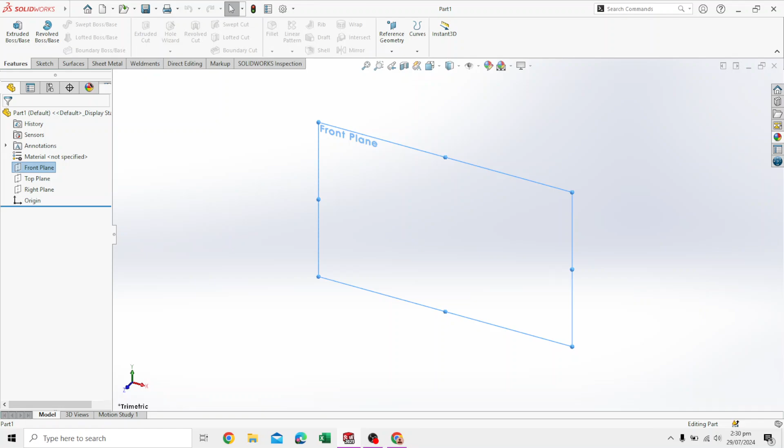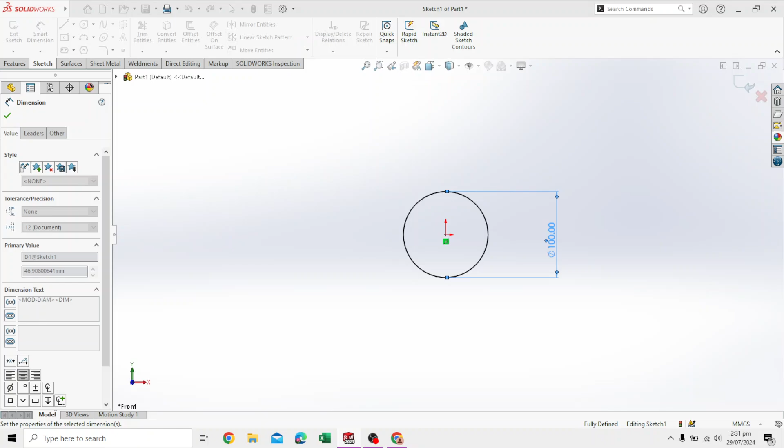And sketch, make a circle, say yes, smart dimension, say 100, yes, 100 millimeters, and say yes, this is what we need.

Move out of the sketch, go extrude it by 80. Just keep clicking this till we reach 80. Say yes, this is what we need.

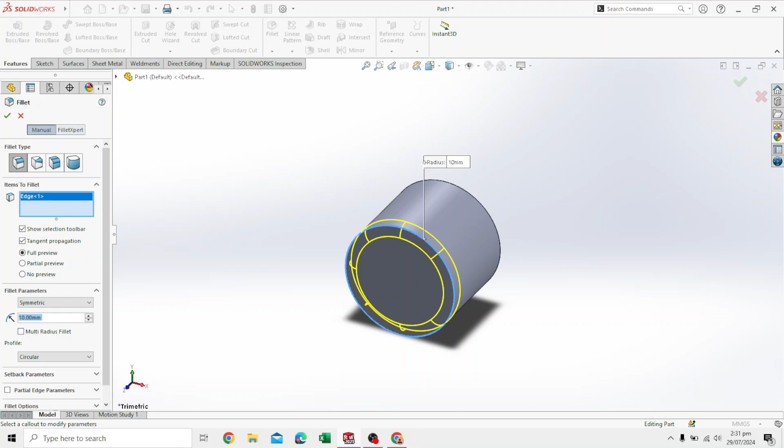Fillet the corners. I think this is the right amount, by 10. I think this is good enough. Yep.

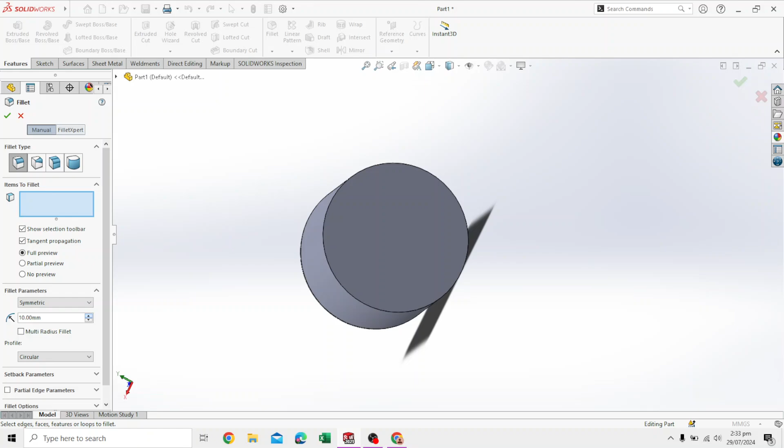Moving on to the fillet, we have to fillet this side by 10 millimeter, this side by 20. So we just go ahead and apply that again. This time just increase the radius of the fillet. Click on this. So again, this fillet is bigger than that one. Say yes, this is what we need, and then we will use the shell command.

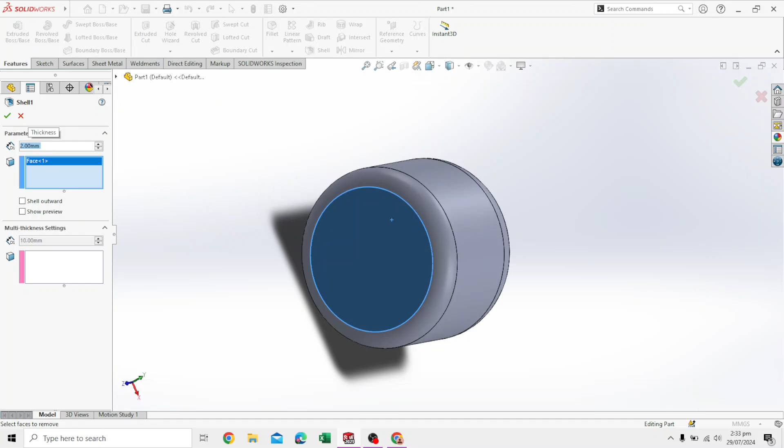Click on this and say we need this to be 2. Say enter, and we say shell.

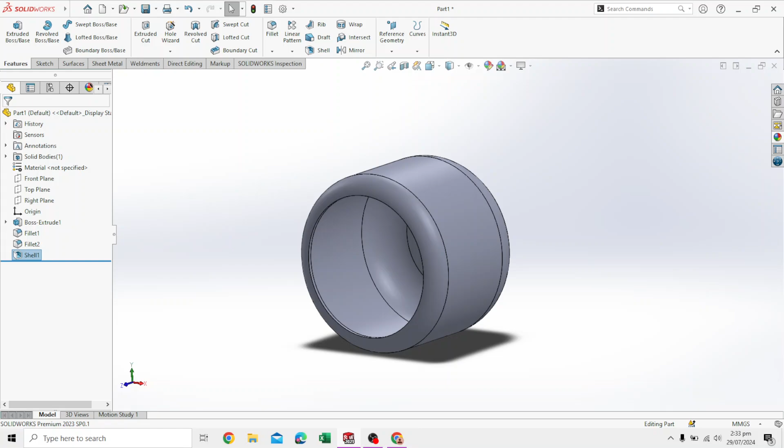So we definitely don't want to shell this surface. We need to shell this entire structure because it's a solid inside, but we need to select the entire structure and then press shell by 2 millimeters and say yes.

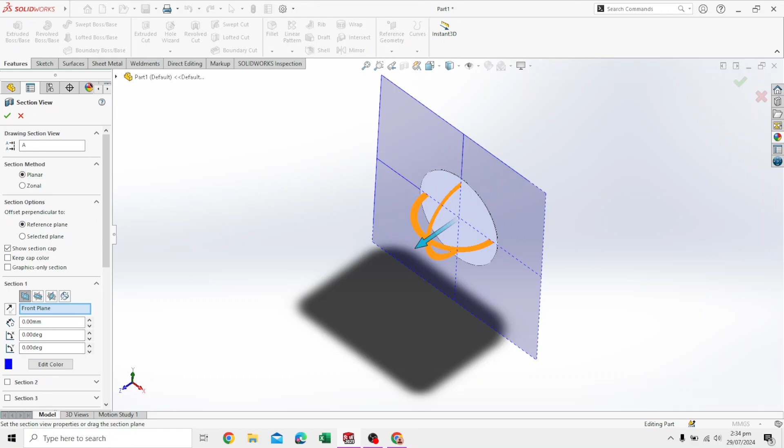And now it's shelled, I mean it's hollow inside, and if you want to be sure, you click this button and move it a bit, and you can see that it's hollow.

So it shelled the entire structure because we started by drawing a circle and then extruded it, so it was a solid piece. Now we shelled it by 2 millimeter after selecting the entire structure, so we can see that its walls are 2 millimeter thick and the rest is hollow.

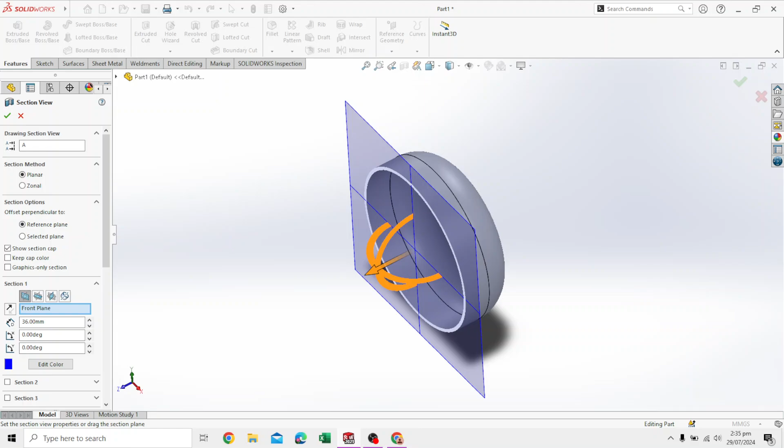So obviously this is going to be the casing of the fan. So we will start drawing on the smaller fillet side, the side we applied a 10 millimeter fillet. This is the side we applied the 20 to. So we'll start drawing on this. Let's sketch.

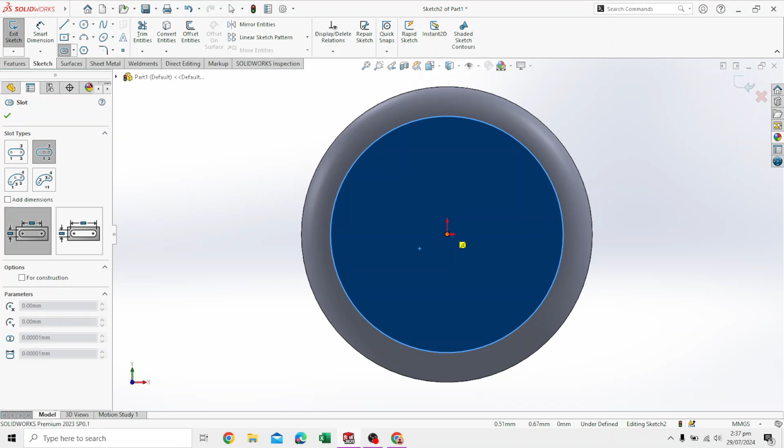We will draw a center point straight slot. It's basically an ellipse, not really an ellipse, but this option, center point straight slot, select that. And from the center point, we just click on the center point. It'll start dragging out a line, and you can just, nope, that's not what we need to do.

Let me just do that again. Don't need to click the center, just need to move upwards in that direction, align it, and draw an ellipse, wherever you want to call it.

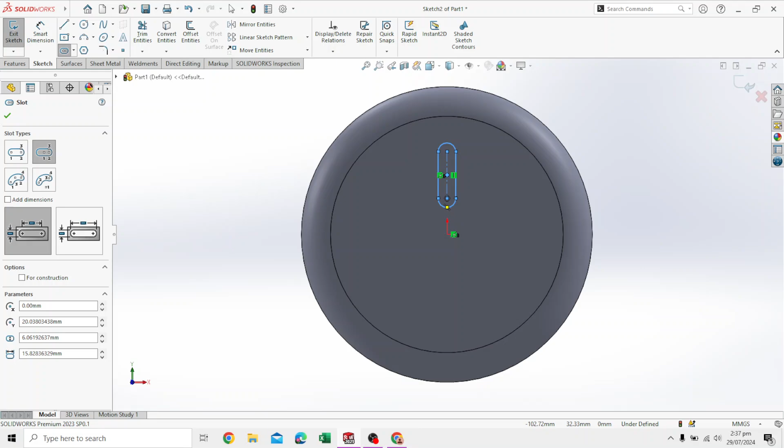Use smart dimensions, and from the center of this to this, it should be 25. And the entire distance of it, meaning from this point to this point, this little piece should be 15. So that's looking nice.

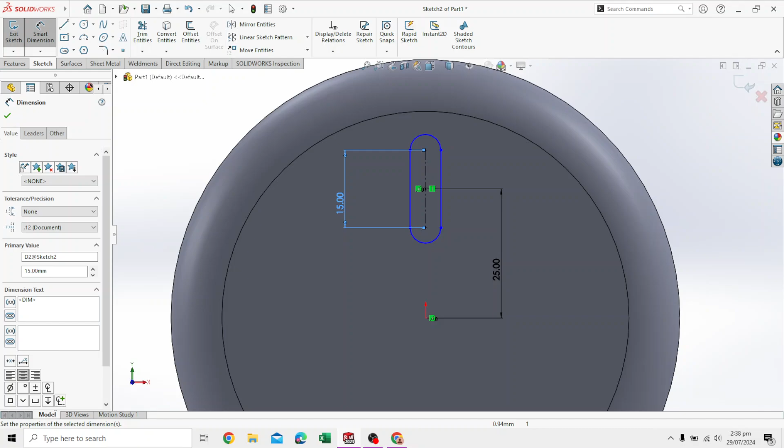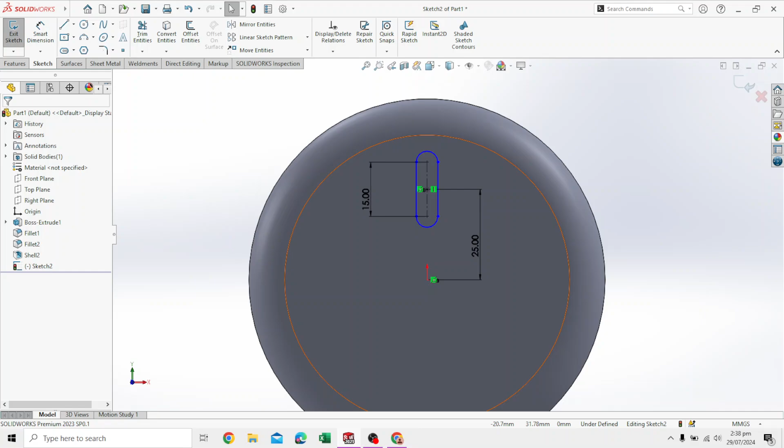And I think we can control something else, but I think this is good enough. This is basically the little slots that are cut out at the back of the fan housing to allow air to go in and cool the motor. This is basically cooling. This is made for cooling. These cuts are made. If you ever see the back of a fan, you'll see little cuts made in this way.

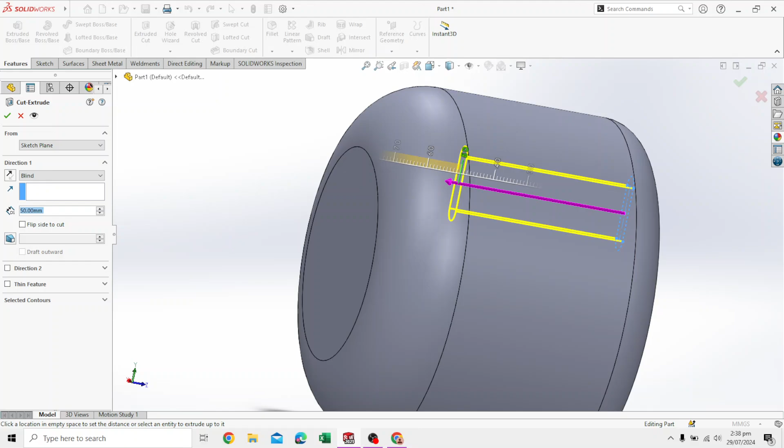So we just say extruded cut. This surface is already obviously created. Make sure it doesn't pass through the front because we need that. And we say, okay, this is what we need. So now there's a cut and no damage to the front or anything.

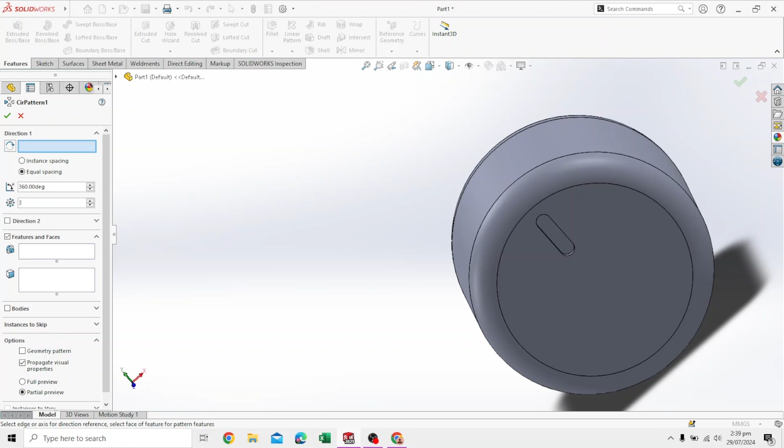We go to linear pattern, circular pattern, drop down menu. There's an option to circular pattern. First, we select the direction in which we will need the pattern.

This is a circle, so we said, okay, this is the direction, and the feature to what feature do we want to pattern. So this cut that we made, extruded cut, so now it's showing a preview of how it will look like if you were to pattern this 3 times, 2 times, 4, 5, 6. Do it as you please.

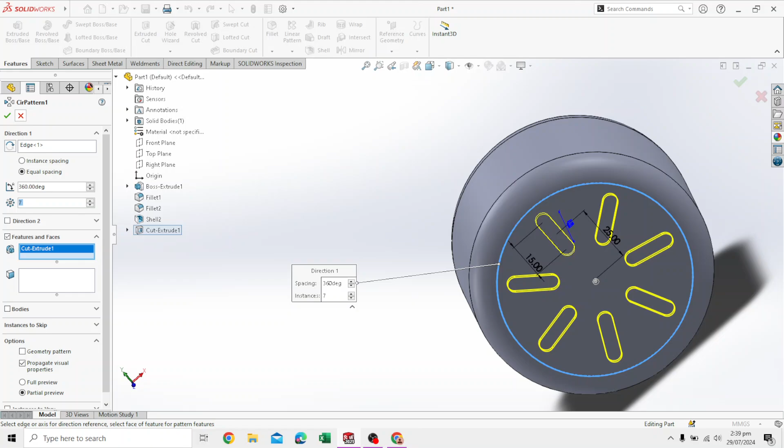I think 7 is looking good for this, so we will go ahead and say yes. And now there's holes cut out at the front of the housing for cooling, basically.

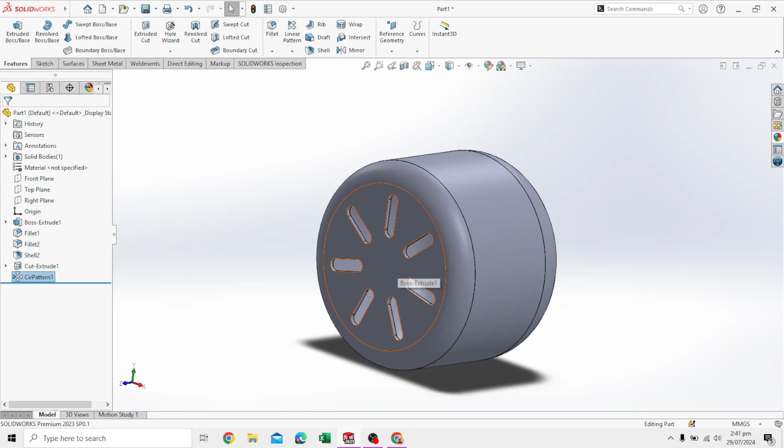Okay, so basically this is the front of the fan. This is where the blades connect. But these slits, as I said before, are made for cooling. We also need to do that at the back, so we will just sketch on the surface.

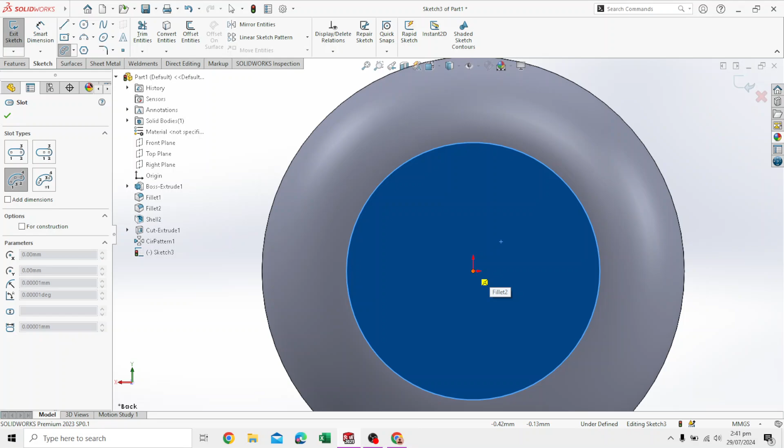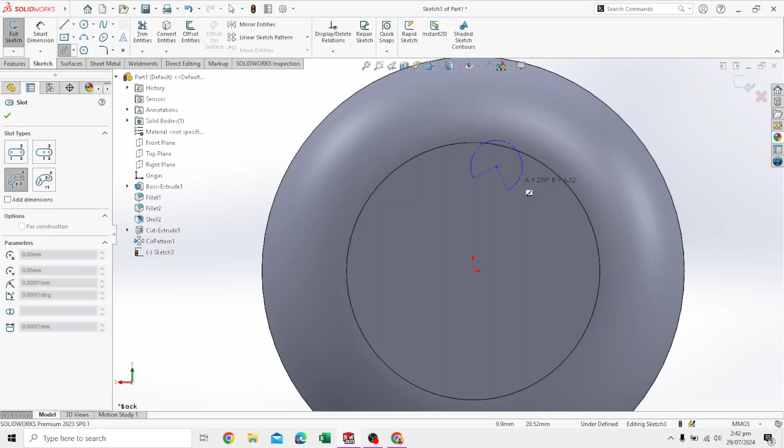This time, instead of selecting in this drop down menu, we select the 3-point arc slot. What we do is basically move up from this point. Select this 3-point arc slot, move up, and just use your intuition to make just this small one. You need to click twice to have it take shape.

It needs to be about this big, not too big, not too small. Say yes, this is what we need, and exit sketch.

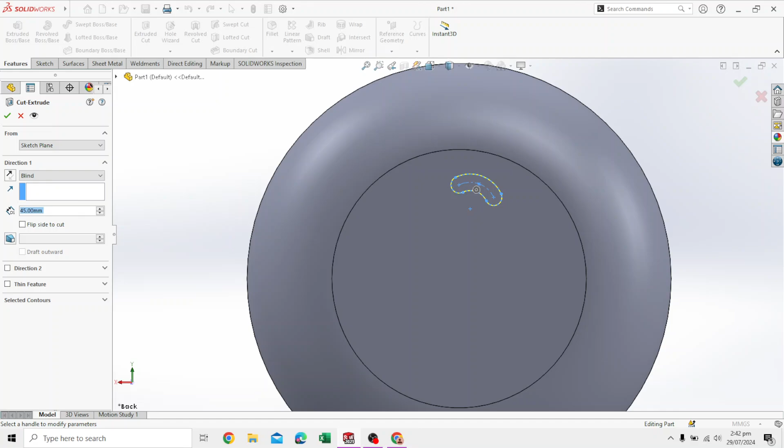Same thing as before, we need to extrude cut it, and make sure it's not cutting the other side. Just decrease the height. Say okay.

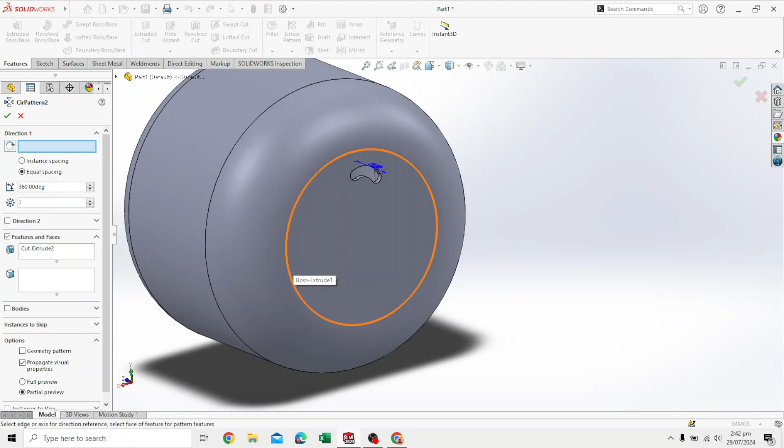So the hole is made, and we will again use linear pattern, circular pattern from the drop down menu. There's a circular pattern option. We say provide the direction. Direction is this. Now it's already selected because that's the last thing we worked on, so it's already taken it.

And multiply it. You can decrease it, decrease it. I think 7 is looking okay. 7 is looking right. So now this is cut out this way.

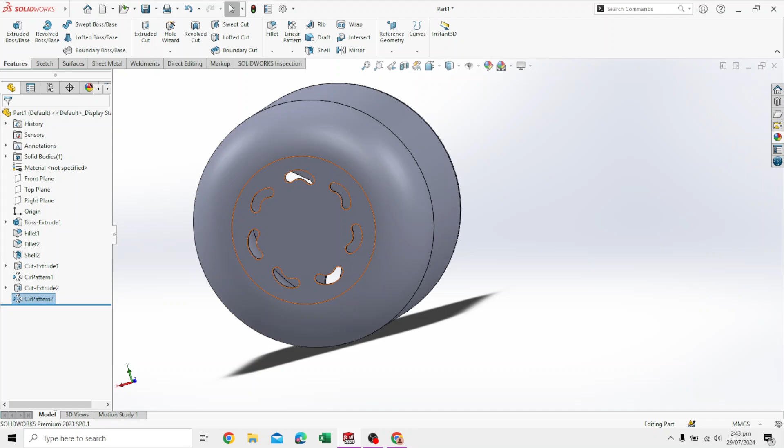You can even make a spiral or a cool looking design. You know those cuts that are made in the disc brakes, J-hook cuts. You can make those with this type of cutting. Looks pretty nice.

Okay, now go back to this surface and say sketch. Select circle, draw a circle. This is basically now drawing the shaft of the motor, because this is the motor housing, so we're going to have to draw the shaft in order to connect it to the fan blades that we made before.

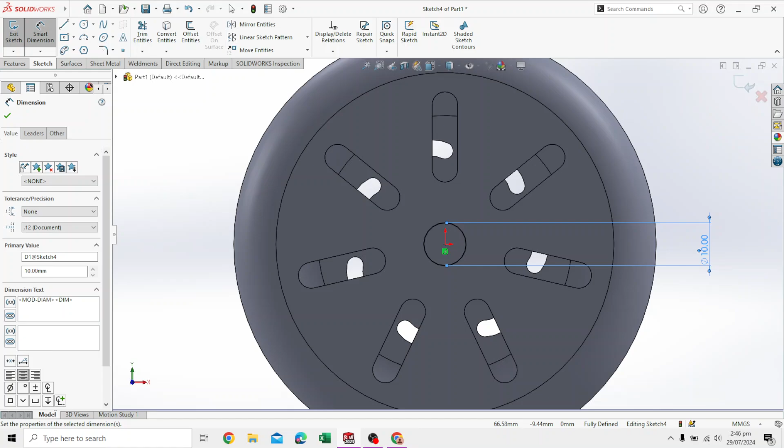Just give it smart dimensions, say 10 millimeters, enter. That's done. We save this, say okay, and we simply extrude it using the features command. Make sure to extrude it mid-plane, so this shaft goes in a few inches because the motor is sitting somewhere in the middle, so the shaft goes in as well as moves out from this.

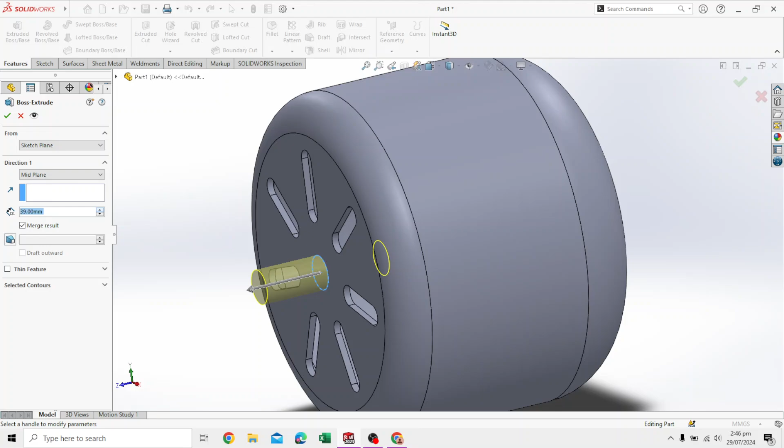So the dimension we give for this is, I think 60 or 70 would be the right value. 60 would be incorrect. I've done it, I've made it 80 millimeters. I think 80 is the right amount.

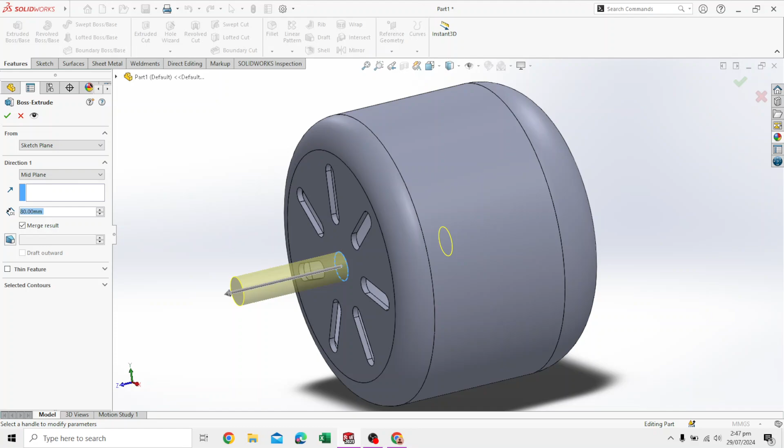Make sure to do this mid-plane so that it goes in, but not passing through the back. It's going in only halfway to connect to the motor. Say this is what we need. Okay, this is the shaft of the motor coming out of the hollow casing.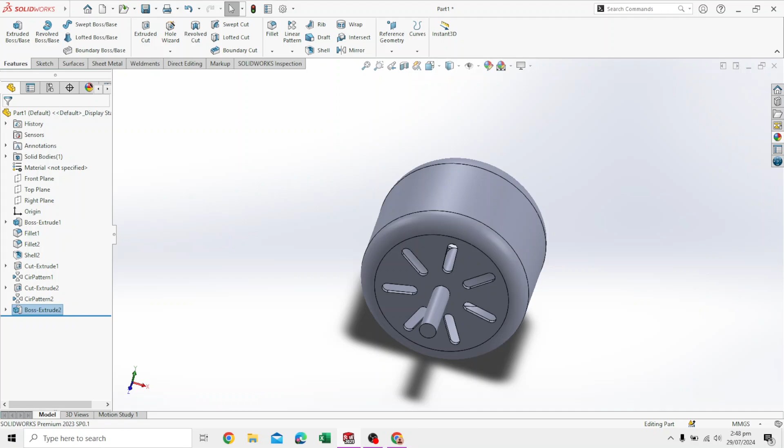And then we go to the top plane. The top plane is this, right, passing through the center. Say okay, this is what we need.

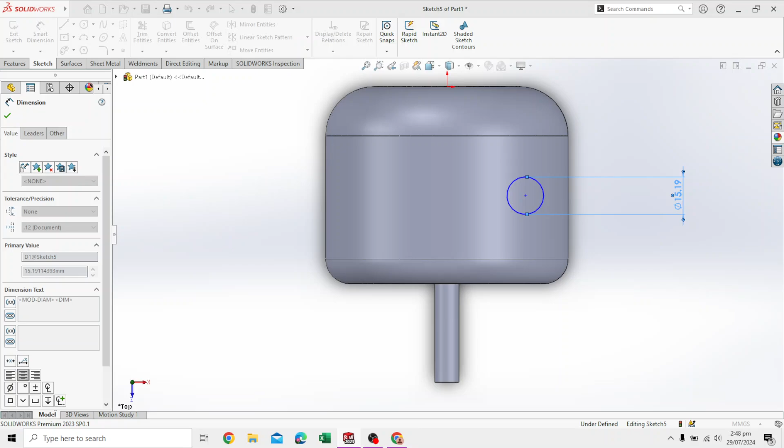Go to the top plane and we draw a circle about here, doesn't matter where, just off to the side slightly. Give it the smart dimension treatment and say we need 12, and dimensions are set for this circle.

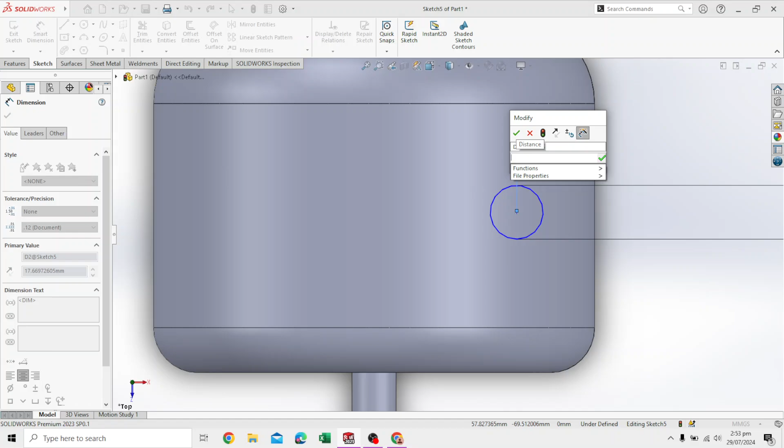Now we just need to set the dimension of how far it needs to be from this wall. We say it needs to be, we give it the dimension of 25, be 25 millimeters away from this.

And again, using the smart dimension, this is how far it will be from this side. Move it a bit down, yes. And this is what we need.

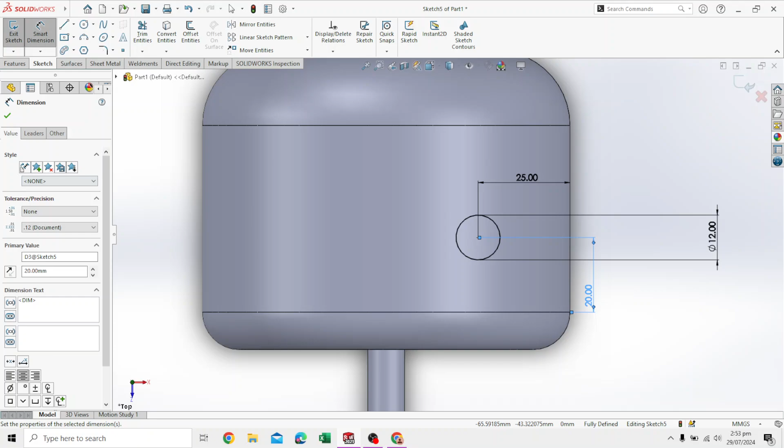Okay, exit sketch. And now we extrude it. Not mid-plane, I don't think we do it mid-plane. Let me check.

We extrude it by blind and 60. Let me check 60, how high it is. I think 60 is the right amount. Okay.

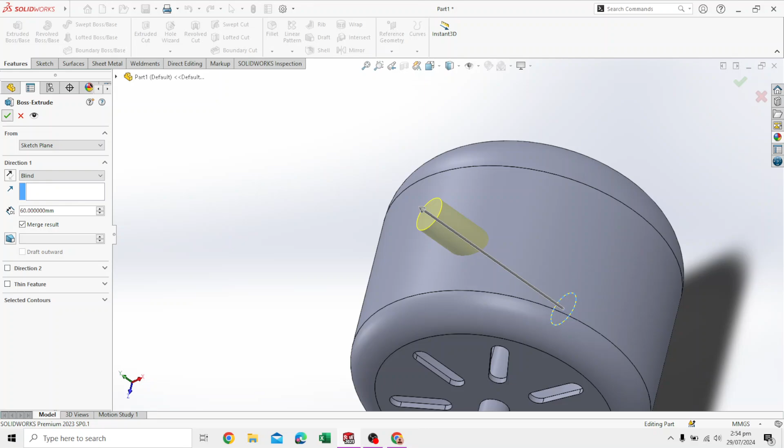Now we need to sketch on this directly. This is basically making the button for the rotation mechanism.

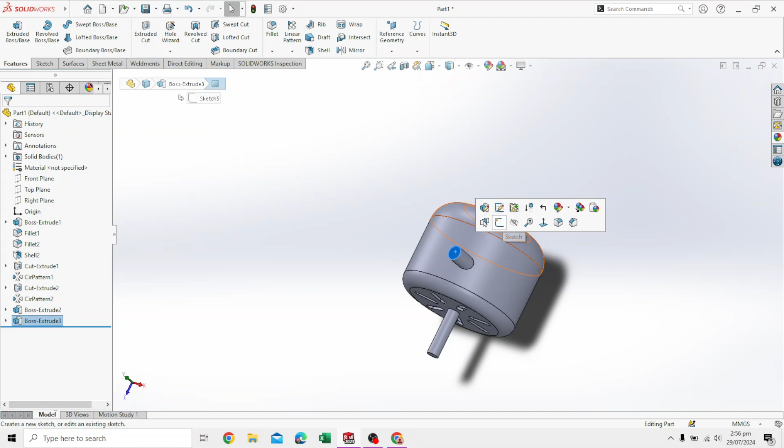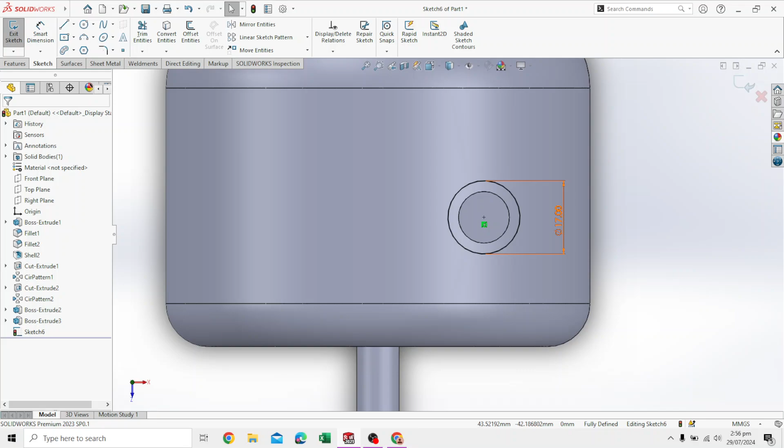Click on this sketch and draw a circle. At the center of this circle needs to be our dimension. Specify it needs to be exactly 17. Almost got it. Exactly 17. And move out of the sketch and extrude it above this by 2 millimeters.

I think 2 is enough, because this is a small button that you press to control the rotation. 2 is good enough.

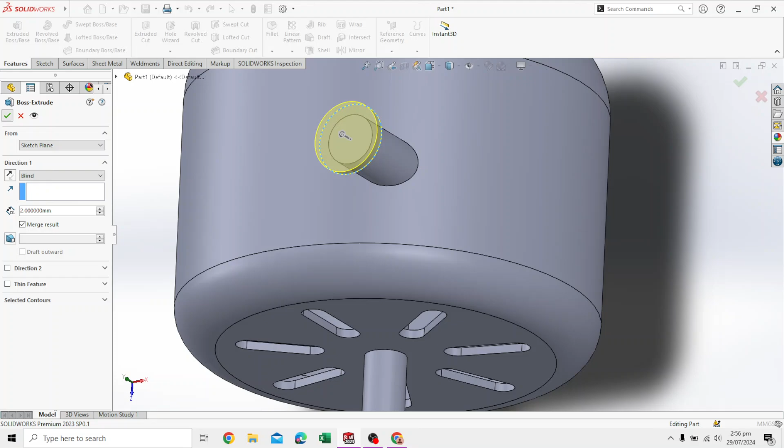And then we also fillet this corner. Fillet the corners by how much? 2 millimeters. Fillet the top corner.

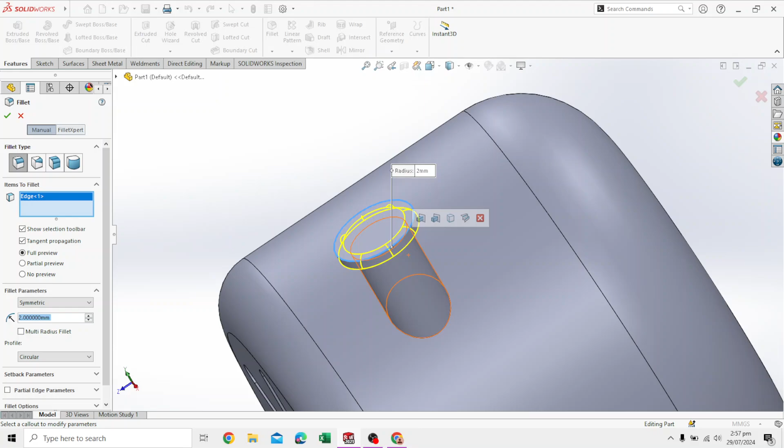And now just save this part, and we will start assembling in the next video. This will be the last part of this series.